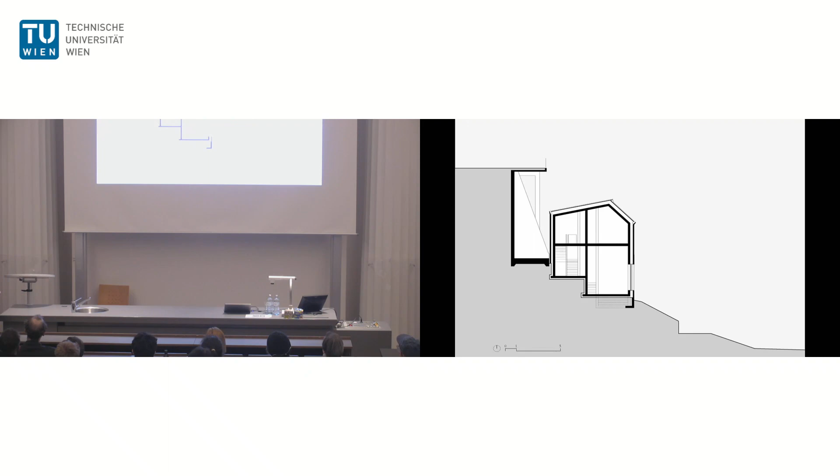Okay, and now go back to the basic tools. As an engineer, I like forces, I like balance. Forces have a feeling, we feel as men the forces. Forces are amazing, and if you try to work with forces, it comes to balance.

So we say force, balance, materials, and then geometry. Now you can start to see when you go around on this wall, you will find different dimensions. Now it's architectural geometry, but when you do a structure, there is a lot of geometry. Having a feeling of geometry means doing a nice structure.

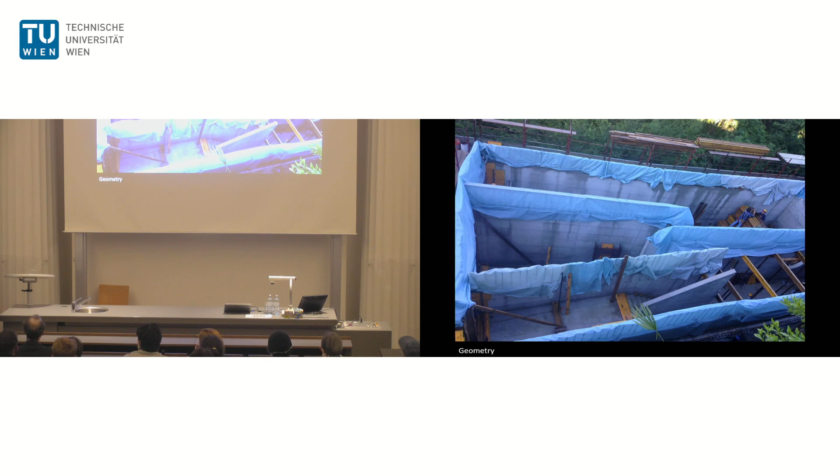Then another thing that for me is really important is the construction process and the imprint of craftsmen. I think it's really important to preserve that, and that goes beyond the materials, go beyond. Just seeing all the work in the construction is something that makes the construction rich. And you see this, Luca was cutting and doing all the formwork in a traditional way.

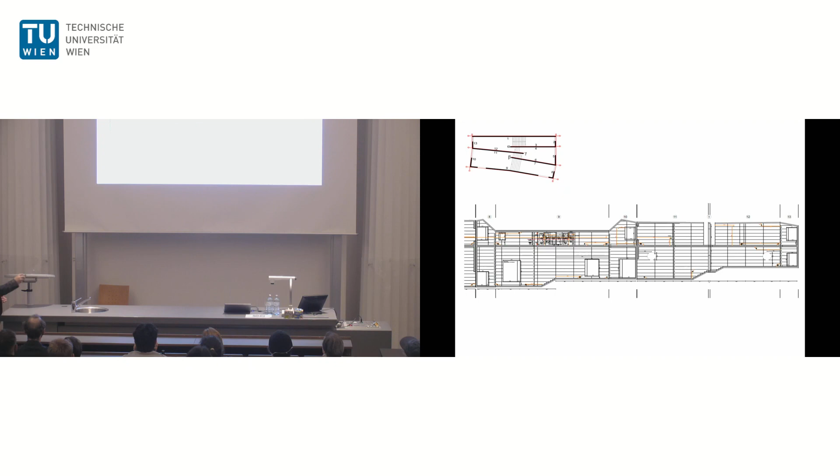And then we just go in deeper. I just draw the formwork, the step. You know, with this traditional formwork, you cannot put concrete too high. Then there is some joint between slab and walls, just to make it disappear.

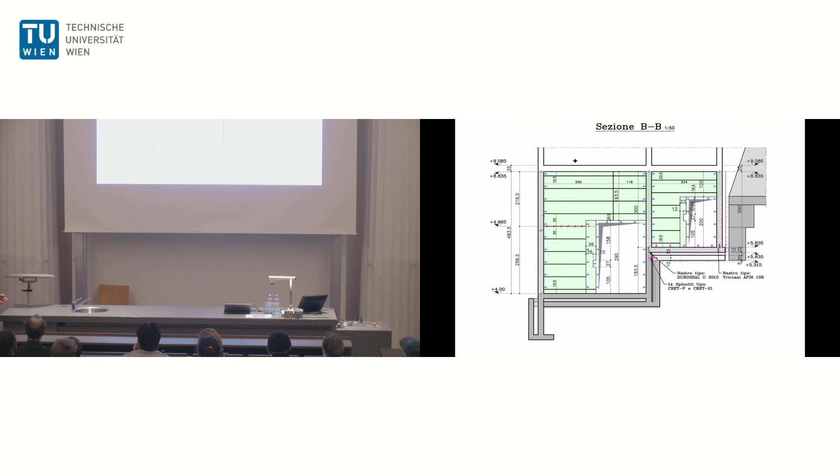I wanted to show to my children the construction as it is, and to put no things. Then I spend my time to take things away and not to add. And then you just see, this is the reinforcement with all the technical installation at the interior of the concrete.

And there you already see a bit of results. You see in this staircase, the formwork that goes to the end. You see the walls, you see the staircase, which is built between walls. This is the interior, you see the different levels. It's always the same concrete. It's a building space, it's really robust.

And you see the geometry and the light that take part and make games in this space, how nice it is. Let's go one step further. This is Christian Scheidecker, you see this staircase. And let's get one back, and you see that it continues at the exterior. This is also nice.

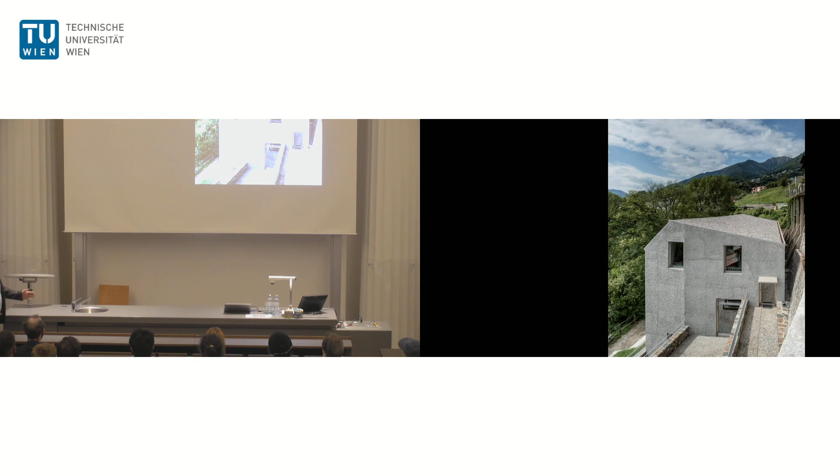And this is from the exterior, you see there are the stones. The concrete is only for, it's a special thing for myself and not for the other. I just put it at the interior. Great.

This was the basic tools. These are the things that I want to put in all the projects that I do. And these are the things that I want to try to do in a different way in the future, just using technology.

Of course, basic tools alone are not enough. We need a strategy for how to do building. And the first strategy is to divide things into portions. This is something that is part of the engineering thinking, to divide things into portions just to make it clear, to take a decision. And I will speak about this idea, this set of problems.

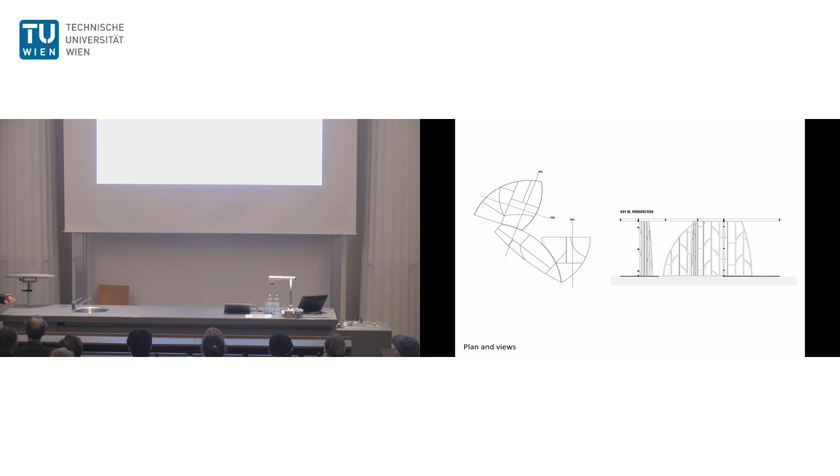This was the topic of the Biennale in 2016. And this was the plan and view. It's quite big, 140 square meters. And then, as with every structure, you just need to be sure that it doesn't collapse, that it works, even if it's quite light and quite simple. Nevertheless, it's good to pay attention. I do a statical model.

I do a calculation, and then I receive results.

Quite complex, you know. I'm sure you have some lecture in structure. A structure, to stay rigid, needs internal normal forces, shear forces in two directions, bending in two directions, and torsion. This is all the kind of forces that I receive.

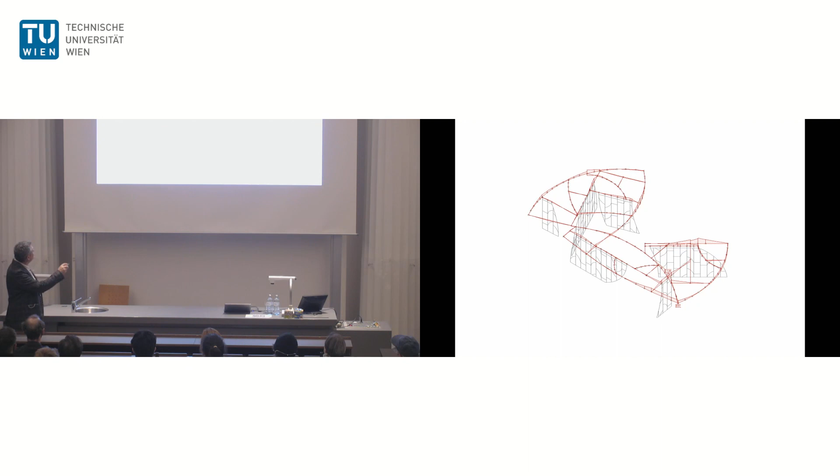So I just say, okay, if I want to make it simple, I have to divide it in a way that eliminates difficult joints. I look a bit at wood, what you find there. The most simple joint is working in bending and shear. If you have torsion, it becomes more complex. If you have bending in two directions, you are almost lost.

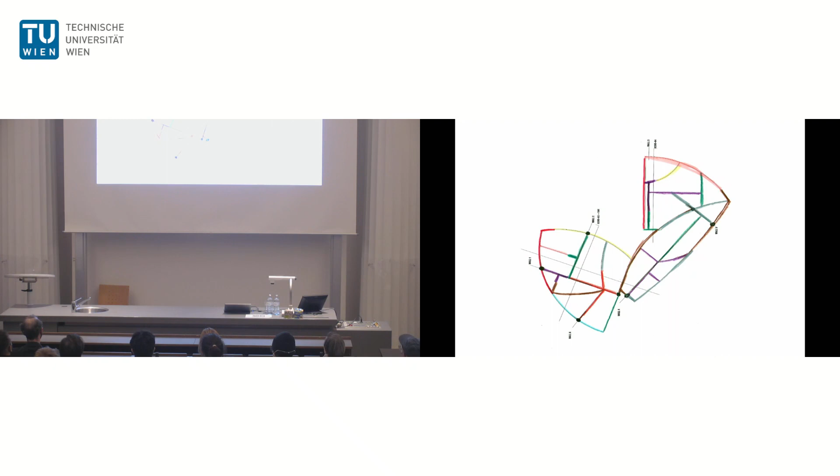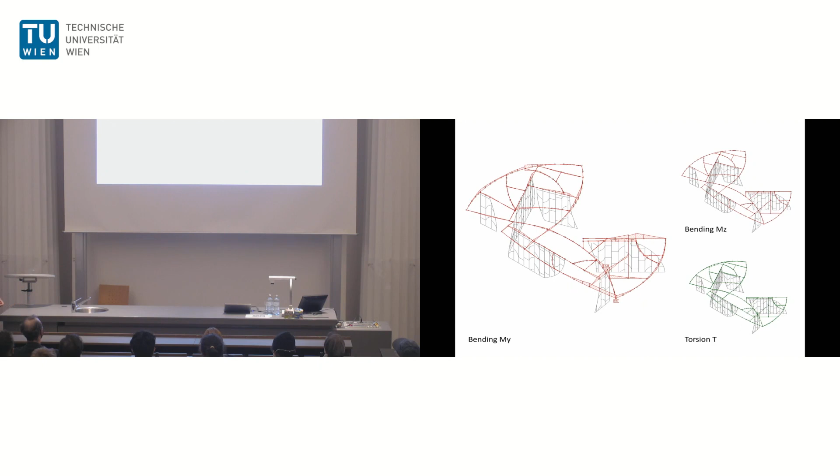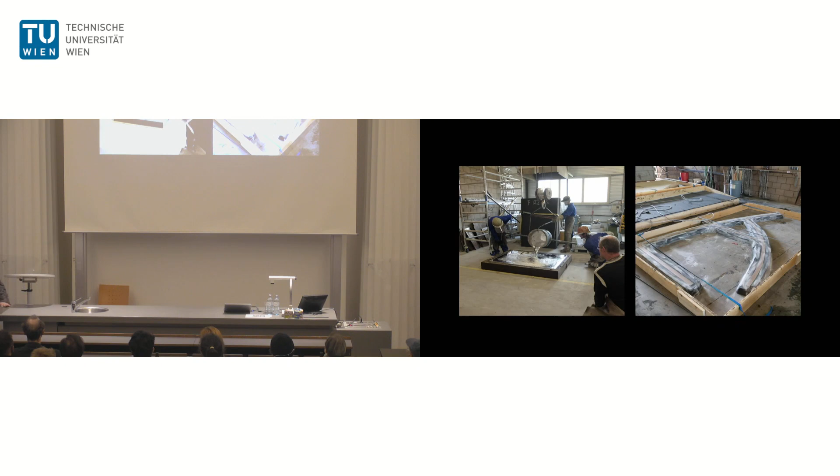So then you see how we do that. The aluminum, you get it warm, and then you put it in shape. This is a panel for the floor, and this is the frame of the structure. There you see the construction and the nodes, which are reduced to only one plate and one piece of steel, really thin.

It just disappears. I really think if you want to make a nice project, you have to be able to reduce things to make them disappear. And this was the construction. It stays.

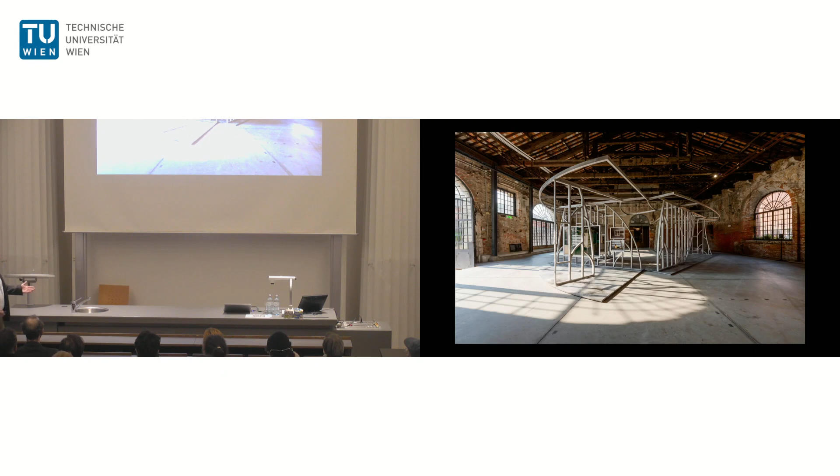So first we have to divide things into portions just to understand it. And the second thing, we have to put it together in a way that we create one unit. This is really important — just try to create one unit through the building process.

I will speak about that with a completely different project, a residence for students in Zurich. This project I did this time with Atelier Scheidegger Keller, and it's only the facade. If you go to Zurich, this is the building — look at this facade.

This is what we want to speak about. Let me show you this building in plan. It looks simple, but it's not that simple because it's not straight — there is a light curve. Then many windows, you see this double height.

And then we have a place where you can grill — it's for students, they have a common space, a common terrace where they can make fire. Then there are pieces that come out. It's quite complex, especially if you want to build it in brick.

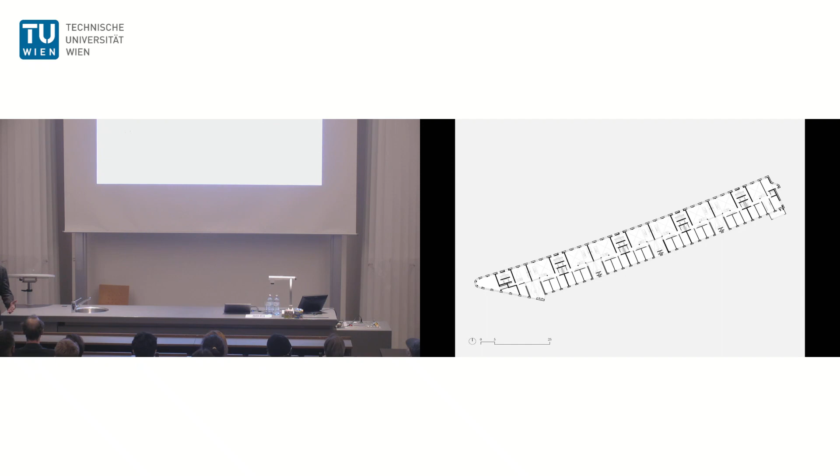This is how you do a brick facade. You see there is the insulation, the windows, everything, and then this is the waterproofing. Then there is some space in between, and then we have the brick, which is carrying the loads vertically.

So it's a structure, but it's not stable — it needs horizontal forces anchored to the structure behind. But because they wanted to make it cheaper, they just did a skeleton, so there was no way to put this anchor. We built a wood structure to carry these loads, especially because in Zurich they use 20 centimeters or more of insulation, which made it really difficult to place this anchor.

And last, there is this horizontal piece of steel, which forms a truss. They are completed with the mortar. If you put some compression, you see that it's a horizontal truss which carries the loads to the anchor back to the facade, giving the stability of the wall.

Great, we wanted to build with these pieces of facade. And the discussion we had was this one: at the lintel, if we want to make it conventional, we'd use a concrete structure covered with Klinkerriemchen, these cut brick pieces, or just a steel lintel.

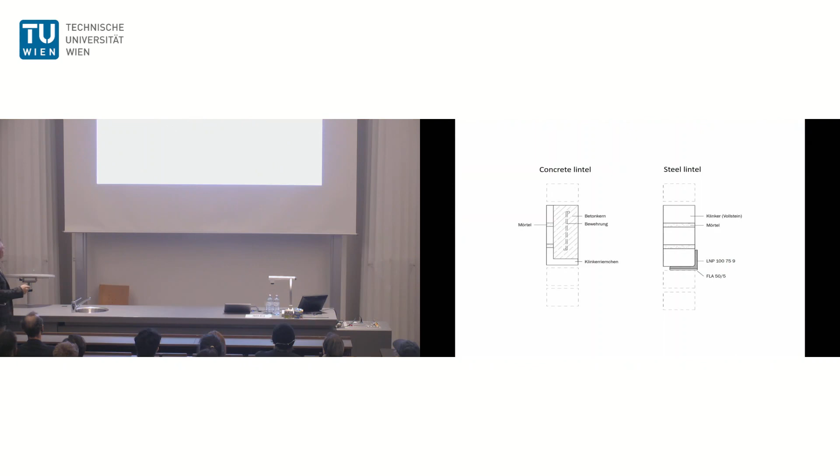And I said, if the structure is lightly curved, you can do whatever you want with concrete, but it will never fit the facade, it will never give one unit. On the other hand, you could say this piece of steel is just a piece of steel, maybe not so interesting. So I said, let's work it out a bit with this piece of steel and see what we can reach with it. Then you see we built the wall, continuing around windows with really simple standard profiles.

And then we just go to the end where there is this curve. You cannot do a profile that goes from stone to stone like this one. You see that this stone is a bit higher.

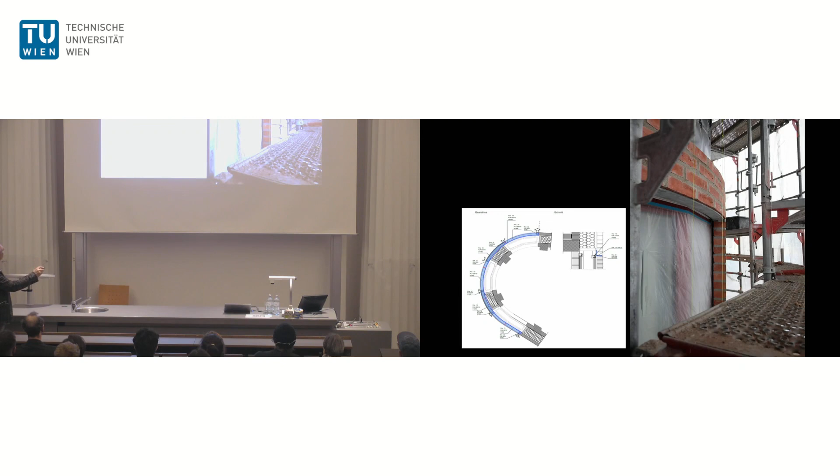It's not stable, and I say, okay, let's continue over all the facade, all around. If you give many supports, it just becomes stable. It's really simple. You see there the situation. And then the angle, this is an angle.

Square angle of two windows, and you see the two windows, and the stone have to fly. And this support can work. We just have to cut it in pieces, put it together, and hang it at the middle point. And then we can continue to put the stone, the brick, one after the other in a standard way. And that creates one unit.

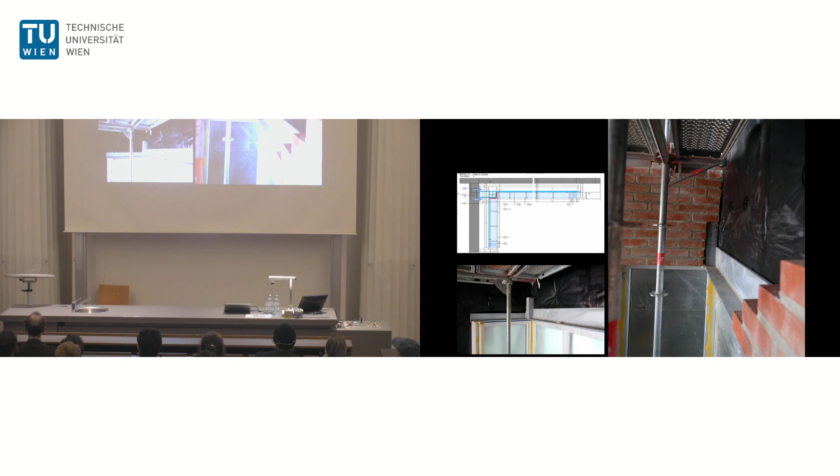And then now we start to make a bit of a game. Okay, there are the entrances, but we have the steel. Let's try to make the steel a bit longer. Then it becomes part of the structure of the construction, and just shows how things are built, and everything becomes one unit.

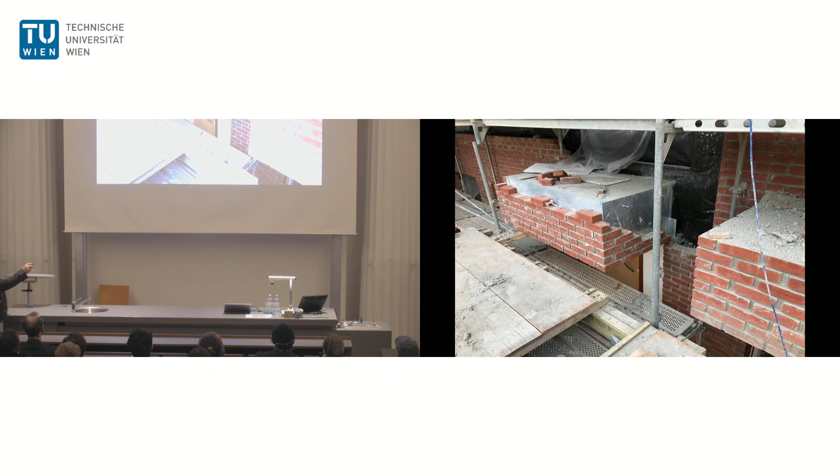Of course, this is a piece of steel. Usually we just cover the steel with the brick, and there are other entrances where the piece of steel is covered, and there is a box with brick.

This is the part which flies, that goes. It's the same thing, just a bit stronger. It's not a piece of steel; it's a beam.

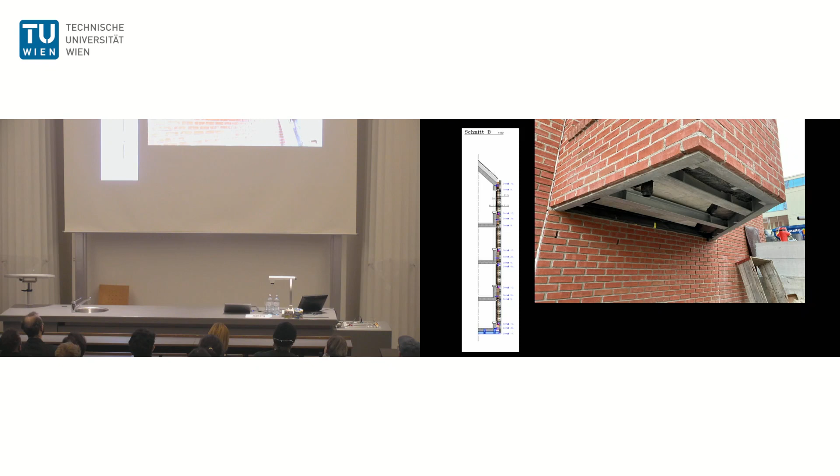These are the balconies. We just add to the vertical part a beam or flat element. There we just connect the horizontal reinforcement of the brick, and we get rid of the problem.

But for the one who is doing the work, it's always the same thing. You just have to put stone one after the other, and he can follow the curve of the building, and we never see a different situation. It becomes just more rich.

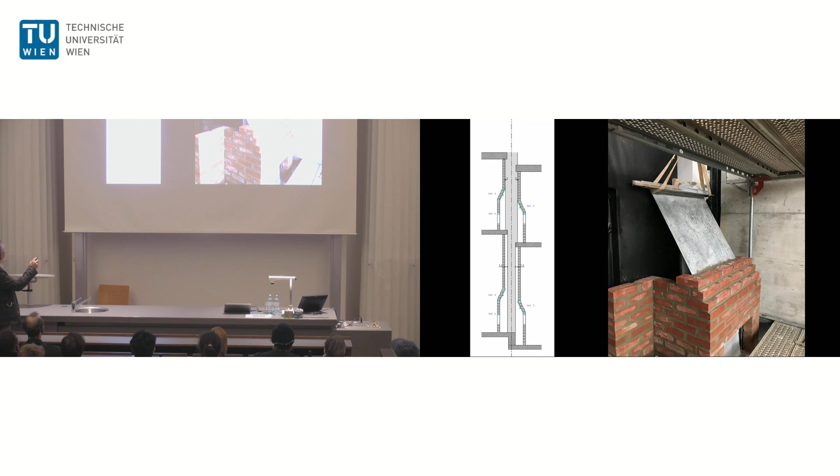And this is the fireplace. You see, we just use brick. We just shift it a bit on the left, and we just give a support. And these are the different levels. And this is a bit of the result.

And it's something that stays in the facade. If you build in a natural way, at the end your eye will recognize that.

Great. Right, now I want to go a bit further. This was a bit traditional. It's what we now have to improve and take into something which is more close to our time, to the technology. And I want to speak a bit about the mechanized construction, that is the prefabrication.

Let's start with a project where I discovered the prefabrication, and how I discovered the prefabrication. It's a project that I did with Atelier Schedeger-Keller. We are in Willen. Willen is a small town, really small, close to Lucerne.

Maybe this is Lucerne. There is this amazing hall of Jean Nouvel. Thank you. This roof, amazing roof.

And this project comes from the calculation model and from the construction. Now we are going back to the further basic tools, and we give a new vision.

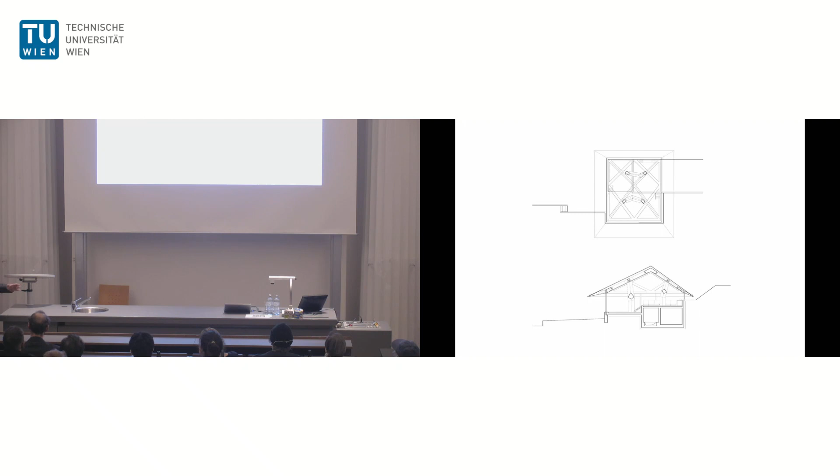But I don't want to speak about that. Of course, I want to speak about structure. It was not so easy to build this roof, because when you do calculation, you know, you can make a calculation of a slab, of a wall, of a column, of a three-dimensional structure with linear elements.

But to put planes which are not flat but have an inclination, and take the forces and follow the forces into two columns, it's not easy to do.

And then I just produced this model. I just continued the column into the roof by dividing pieces and by producing a truss, a three-dimensional truss, really simple. Then you can do simplified analysis. You can design the elements better, and you are more close to the building process.

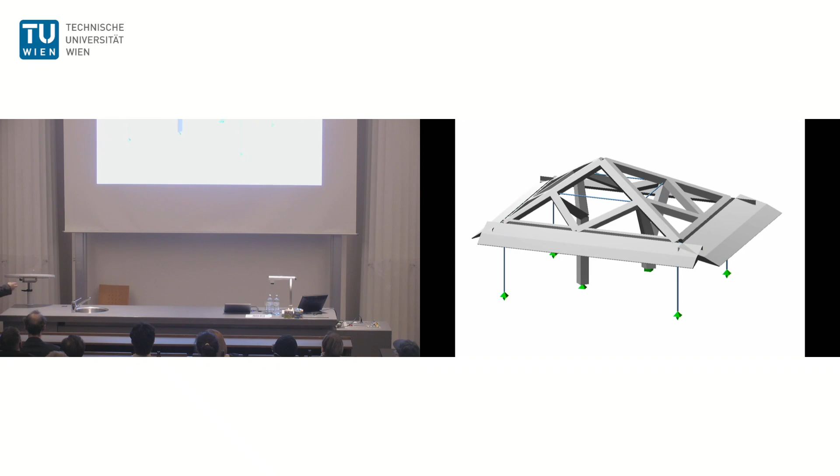Of course, of this model, Christian built his own model of the structure, and then it was clear that the blue part had to be built and can carry the part which wasn't there, and then we studied different solutions. Let's put wood, steel, but we say, okay, we stay with concrete.

And this is a bit the model in wood, just to see a bit better how it looks like. You even see the thermal cut between interior and exterior.

And then we just do the formwork, and it becomes a construction problem. You know, you cannot build a nice building if you don't know how to build it. And if you use concrete, concrete is fluid. If you have to put concrete on a slope over this high, it just falls down.

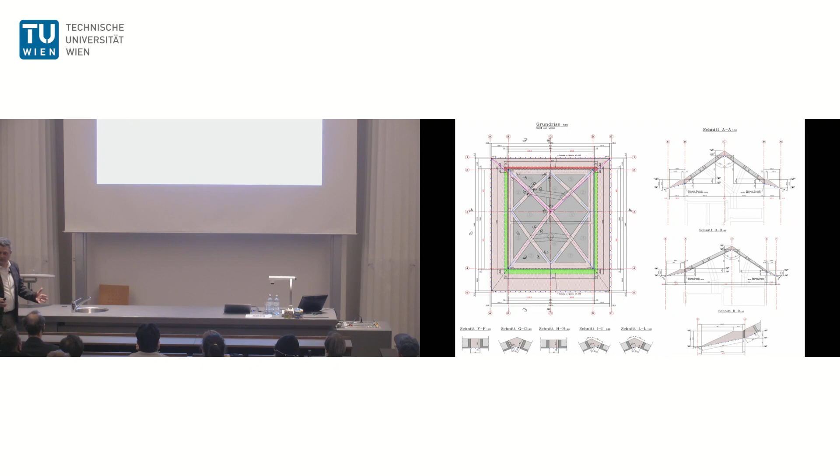And then one idea: let's complete the panel, this panel that comes from the calculation, with a vertical element in order to produce, by this lost formwork, with the precast element, the beam that we will put in place in a standard form. We already receive a closed geometry, really simple to build.

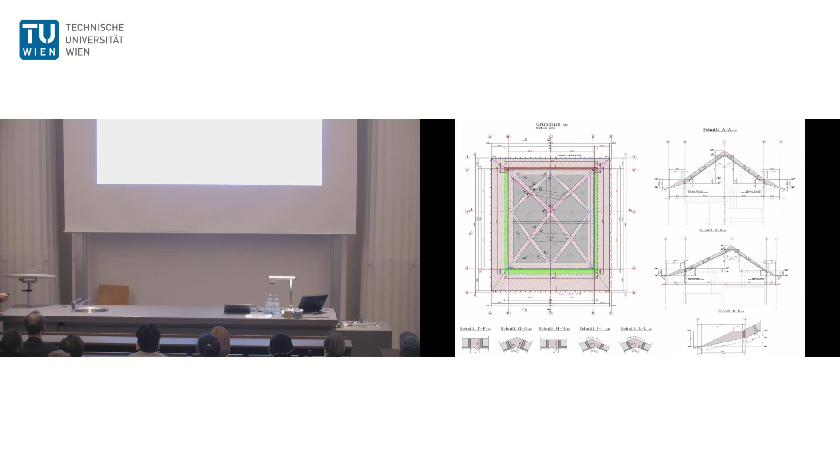And so there are our precast elements, which come from the calculation and which are an incredible help for the people that have to build, which causes everything to become really simple and really precise. For this construction, it was really important to have something precise.

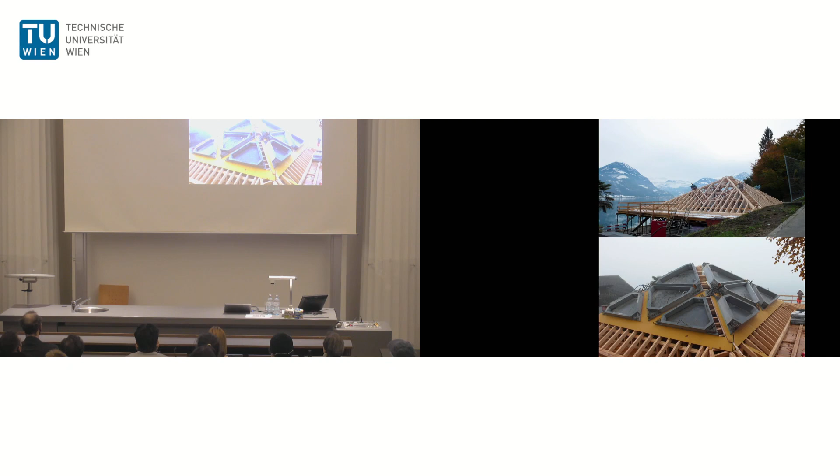And there you see the construction steps. This is the support. Then we put the formwork, also these precast elements. We close the space in between, just to create these beams. And then we have the reinforcement, which we put there.

Pay attention to this element. I will tell you something after.

And then you see the exterior piece, which is cut. It's completely independent, and connected to the interior one with steel beams, a bit curved, with some insulation.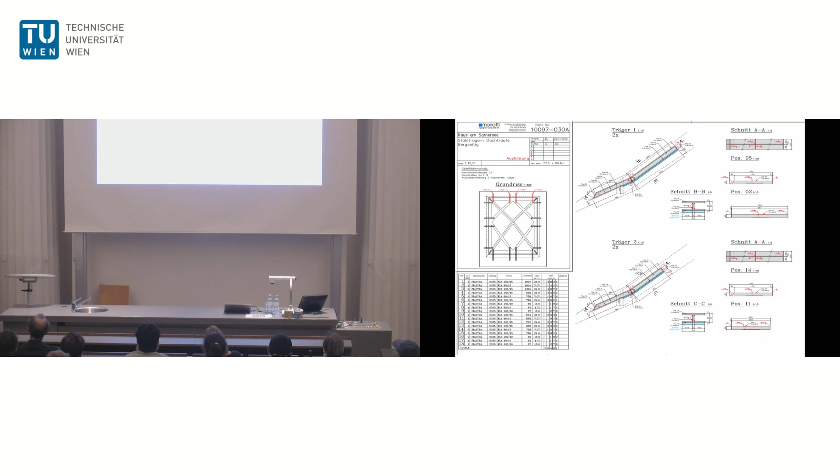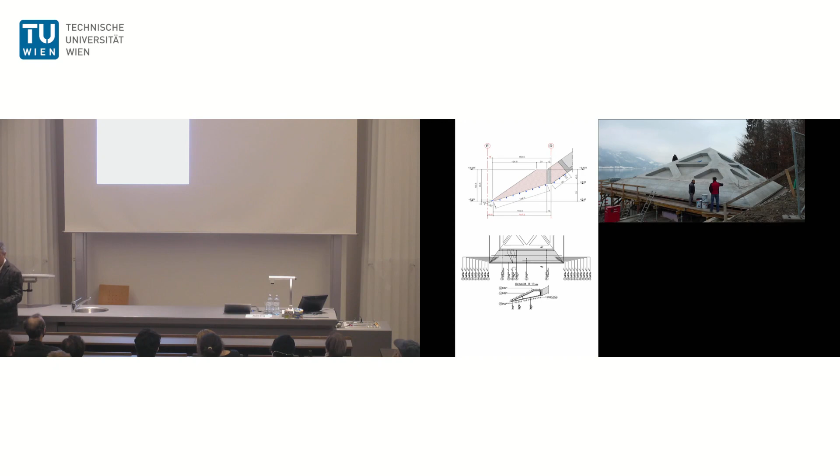And then this is the exterior part that we built after. And you see this amazing roof, which from many pieces becomes only one. Just get it together. And you see this is a view of the living room.

You see the promenade, you see the lake, you see a bit of the mountain. This is from the kitchen. Give a look, the mountain disappeared - I just left it a bit. The sea is not so big, but when you are in the kitchen, it's like being at the sea.

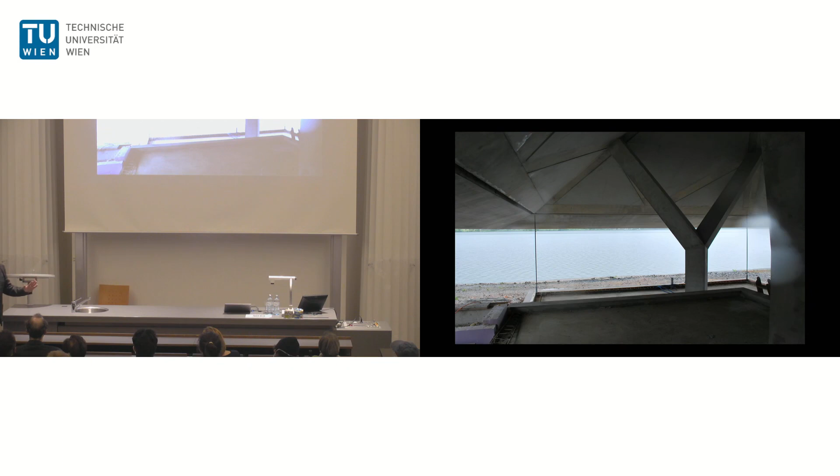And when you go down to the bedroom, you just see the mountain, and then you have a different atmosphere. You see this piece?

Let's go back to this image. This is symmetrical, this support. This one is a bit asymmetrical. When you put a roof, a symmetrical roof, on 4 points, and the roof is symmetrical, the forces just split into 4 parts, which are similar.

But now let's try to carry the same forces, which on one hand like that, or on one hand like that. This one just goes down. And if you have a roof and you just let one element go a bit down, it starts to shift.

At the beginning, this pillar was a bit more close to the center. But during the construction, Christian said to me, 'Can I move you a little bit?' Yes, of course, let's move it. But then, when I redid the calculation, I was really saying, 'Oh no, it's not possible because we just moved it that much.' But the movement that you receive on the windows and the horizontal movement are incredibly high - we are speaking of 4 or 5 centimeters.

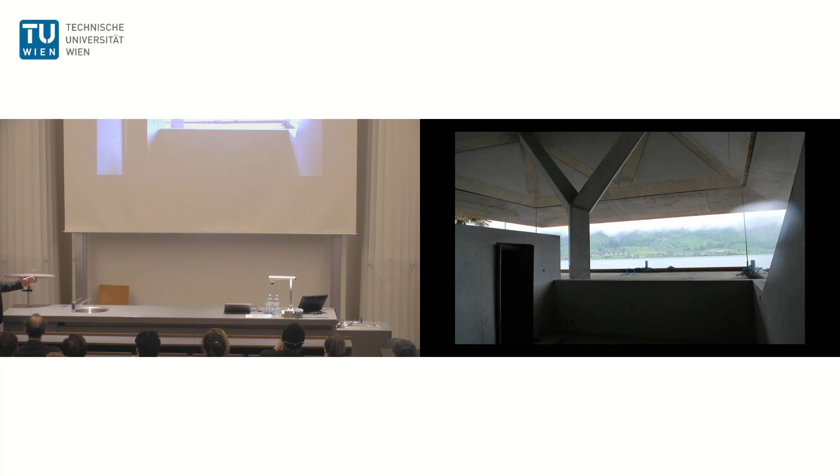And after the construction, I just made measurements, and I just let it be. At the beginning, it was one pillar for each corner. Now, there are 2 pillars and 1 cable on the back. But nobody sees that.

OK, and this is the house. You see it, it's amazing. I can tell you, when you go there, it's small, only 90 square meters, but it's incredibly rich.

Let's go to another project. I want to speak about geometry and joint. If you do precast, you cannot avoid the joint, no? But it's just how to accept, how to look at the joint. This is important. I have the opportunity to speak about a project I did with Studio Anne Holtrop, with Anne Holtrop. It was my first project with Anne Holtrop.

It's the National Pavilion of the Kingdom of Bahrain for Expo 2015 in Milan. After Milan, it went back to Bahrain. This building was moved from Italy to Bahrain. So we shifted a 2,000 square meter building in concrete to another continent. I think this never happened before, but we didn't realize that at the beginning. This was the plot, Expo Milan 2015, and this was the plot of the state of Bahrain.

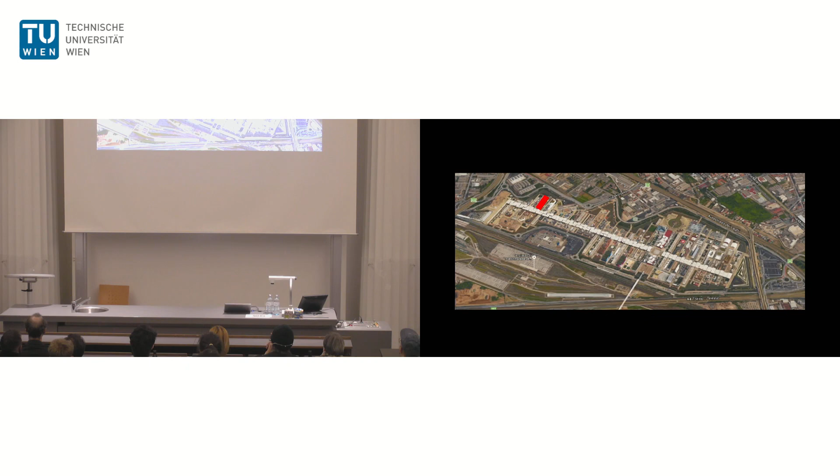And the idea of this pavilion - I don't know if you've visited it or know this pavilion a bit, but you will see it. Basically, what is a national exposition? You have to try to take the characteristics of one place into another. You just look at the shape and the landscape and try to redraw it, reinterpret it with line and circle.

And then, if you put this idea onto this plot, you just receive such a drawing. And then you have to try to give the people that visit this building the impression of being in Bahrain. You put everything you can - the color, the smell. And this you can do with trees, you know.

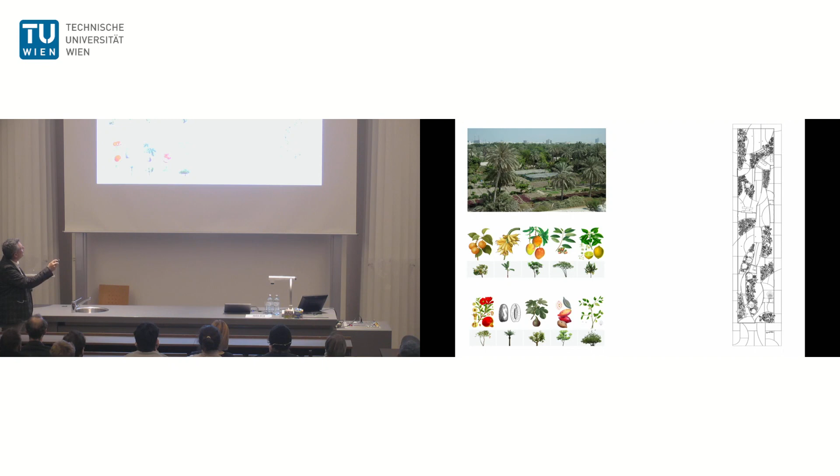And then you see the project become more rich because you start to take place away and put some green space with trees, and then there is a walk that you can do from one door to the other, or coming back. It starts to work.

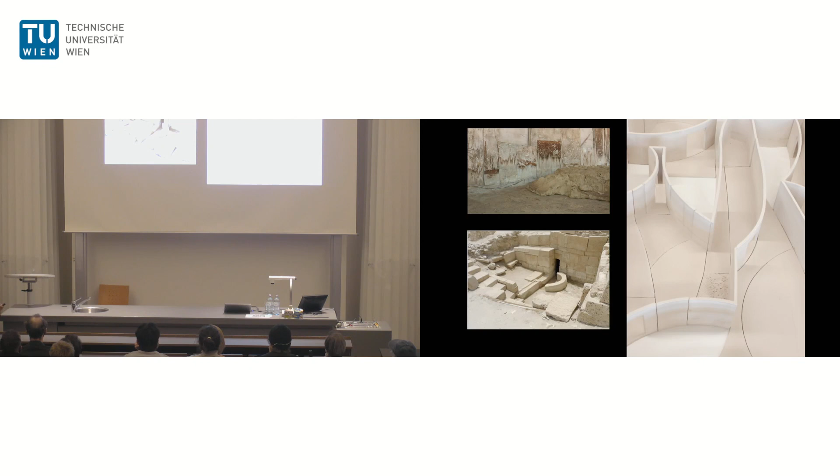And then, of course, this was a bit my part, the construction. This kind of material, the stone - let's try to build it dry, to put stone together. Not all stone - we wouldn't take stone from Bahrain, put it into Milan, and then back to Bahrain. It was a bit too much. Use stone from Milan, and let's try with precast concrete construction and see what happens.

And we start to make an engineering of this project. This is the tessellation - it's something really nice in mathematics. The shape, how can you put shapes together? Which combinations are possible? You discover that not every combination is possible in nature, which gives you some advice about structure, but this is not the topic of today.

We have a production tessellation - what you can do with a certain amount of money, really engineering. Flat lines, you can do whatever you want, big or small. You just have to pay attention that you can carry the elements. Curved lines are a bit more difficult, because if you make a curved wall you need all this kind of formwork, which is really expensive. And then you cannot have all the possibilities.

We just reduced it to 7, but we let the opening free. We let the angle of the element free, depending on the size of the formwork. You see it stay on this vibration table that gives us a bit of dimension. And then you see a bit of the transformation of the project - this was the beginning, and this was after some months of work. You see this element, this area, become a bit less large, because otherwise we couldn't transport it anymore. And from all these angles, you see that we reduced it to this criteria.

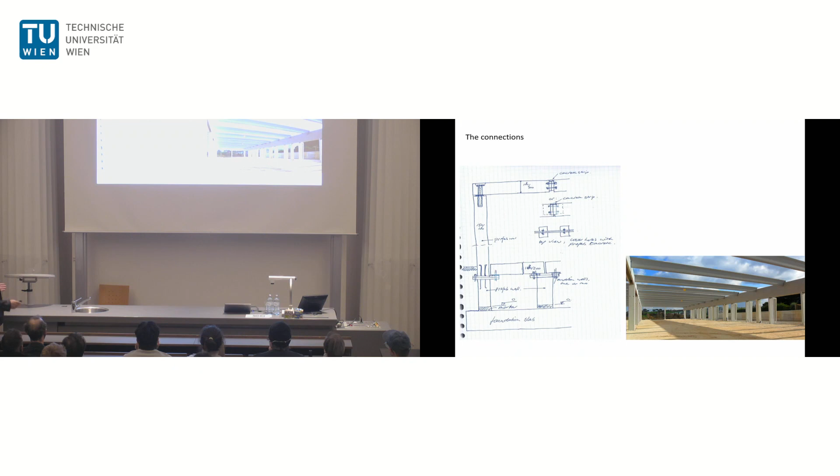Okay, and now let's speak about connection. This is what you usually do - usually you just start to work with steel. You don't do connection with concrete, it's really difficult. And this was the first drawing that I saw when I started to work on the project. And then I said to him, look, I think we can just put things together and we can transfer bending.

This was the image of the discussion that we had. I said to him, with a piece of steel, I can transfer bending from one element to the other, which means I can connect elements in a rigid form, the same way as we saw on the aluminum frame that I showed you at the beginning. Then it was about how you put this stiff element between two pieces of concrete - you needed to have it on one side and then stack it out.

Not so easy, but we just believed that this could be a solution, and we even drew it and tried to understand if it was possible. And then we studied a cross-section of this pavilion.

We say, okay, let's cut it in a simple form with axis. And then we discover the geometry becomes really complex because this wall, this support, which appear and disappear, are really difficult.

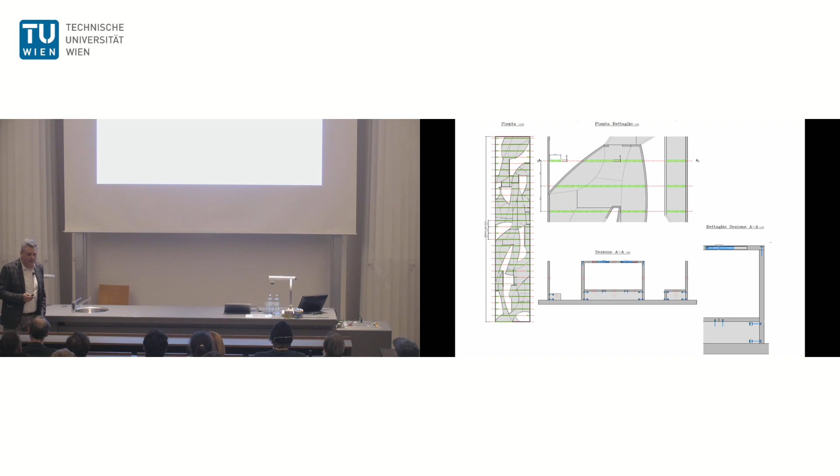And then we try to simplify. We get rid of this support. We just put steel support. We get rid of this, and we just make independent support.

And we just realized that the connection that we studied was good for the wall. Cut the wall in two pieces.

It's important because you can build only small pieces, or you can build a long element and divide it into pieces, because you go from 4 meters into two pieces of 2 meters, which is really important for the transport, both in Italy and out of Italy.

And you see this connection done by the wall, by the construction. We just put the steel on one side. We let one open, we put some concrete on it, and we close it perfectly, and it was stiff.

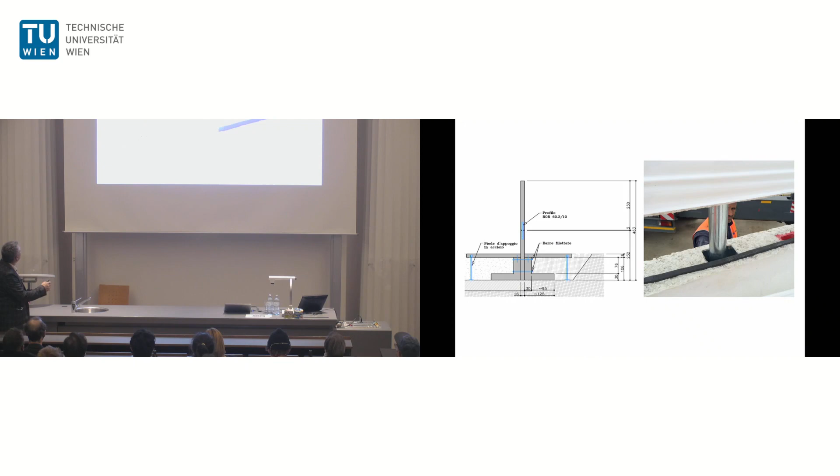And then we worked out these details, and we got one idea: why don't we, if we cannot move it, just let it open? We let these details open to the top, and put it from the bottom, but then it doesn't work because...

You don't have the forces. And at the end, we got one idea: we just use a piece of slab as a beam. We reduce the thickness, and we support pieces of the roof on this element.

You see it better there. This is working as a beam, and the rest is in equilibrium over the other, just in a puzzle, a three-dimensional puzzle. And so this is the design we tried.

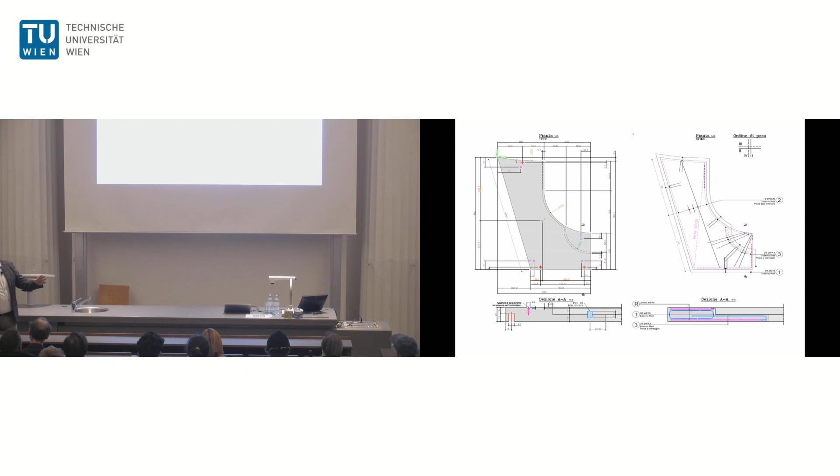We designed it just to see if we have enough space, because we didn't want to increase too much the thickness of the elements. And there you see the final drawing.

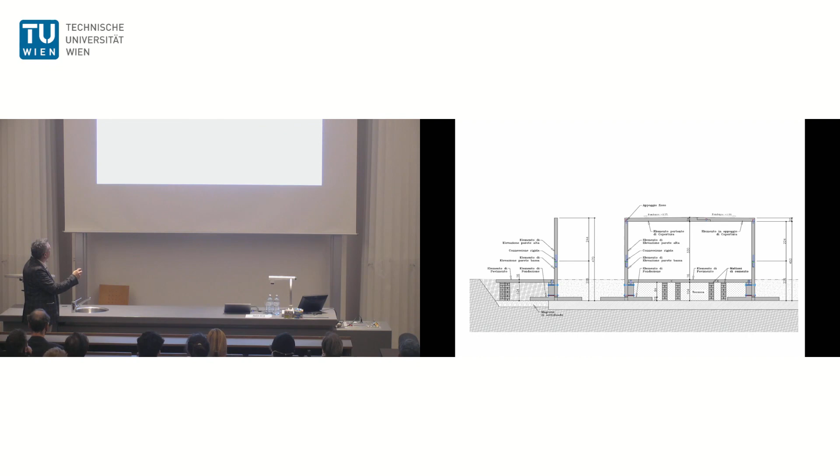We get rid of the steel, we just work with concrete. We have some foundation, the floor elements, the walls divided in two, and then the floor with this connection. And we produce all the panels, and then we put it together.

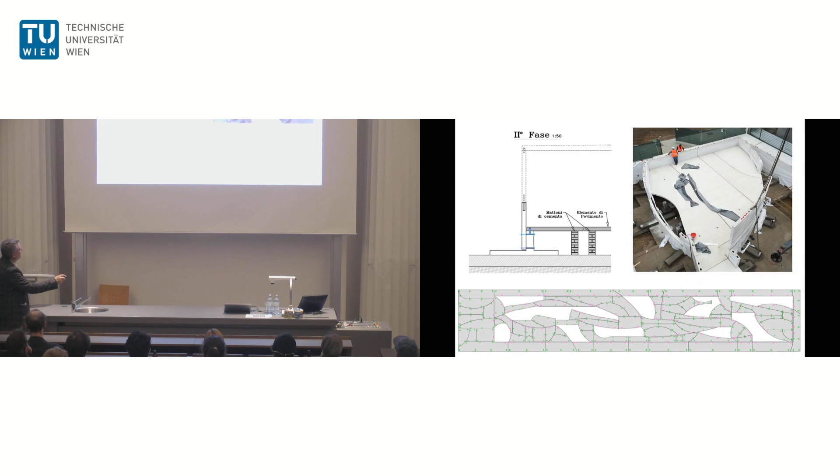You see the foundation with the wall. This is the drawing. Then the floor elements. This was the part that I showed you. There. Yes, there. Then we put the second part of the wall with this connection.

And then, hopla, the roof, and you see this kind of joint. And there we see that this puzzle just gets together without any screw. And the joint becomes the nice part of the building.

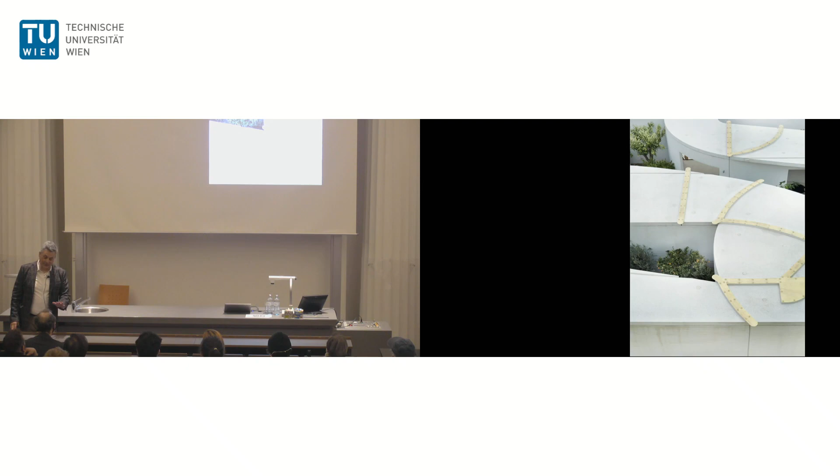And this is from the top. And then it was quite terrible. When you finish a building and you are really tired, to see that again on your table, it's quite terrible.

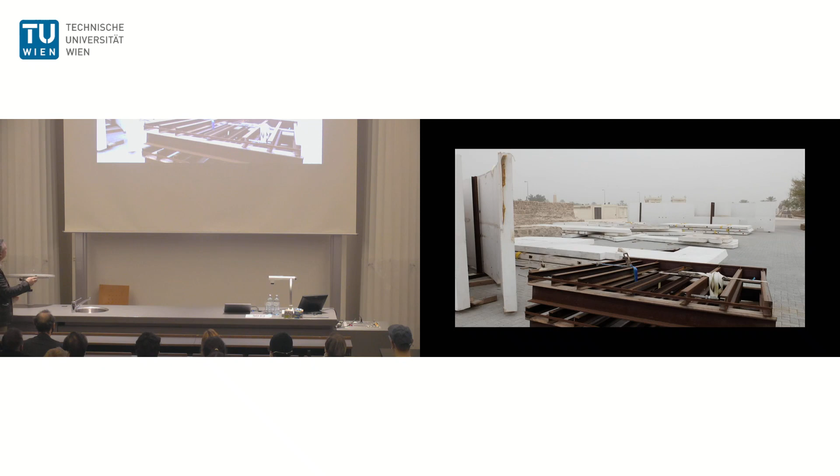Then we take it apart. We cut the steel, and we put a plain steel, because we didn't have so much space between the two walls. And then we put it together again, and this time it's in Bahrain. And you see how nice it is, how it fits in the original place. You never think that this building was coming out of an expo.

Material. This was also a nice, incredible experience that I had with Anne Holtrop. We wanted to build a souk. This is one project that we started exactly after the expo in Milan.

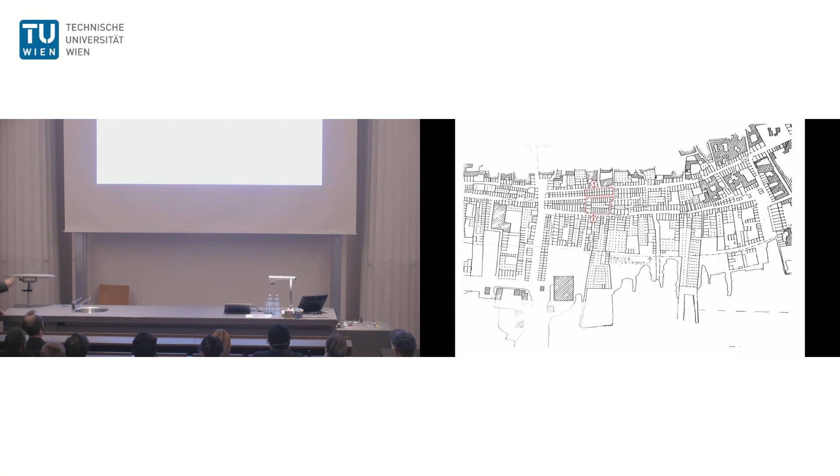We are in the old city of Muharraq, in Bahrain, and we received this plot, this old souk, to make it new, and draw a really simple plan, really simple, because the idea was to make it in stone.

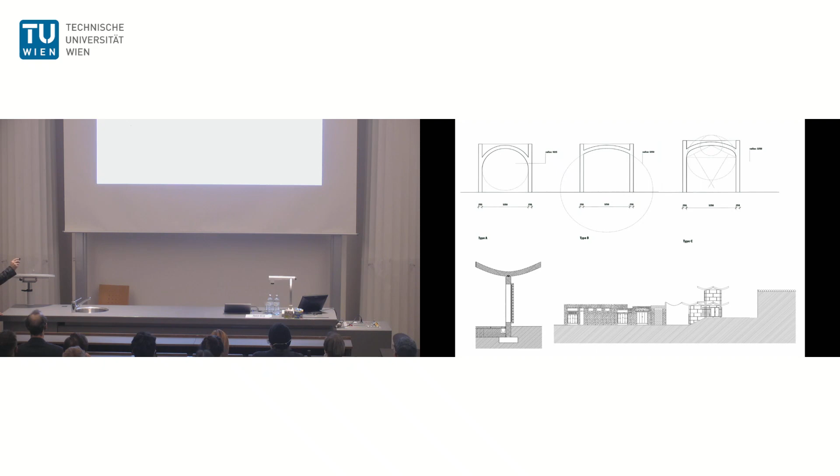And then we just tried, okay, this is not good, don't do a circle if you do one arch. It's a parabola or a catenary, but not one arch. And then we tried to correct it and put some loads on it, and then we cut and we get this shape. And with some work, we get into this shape, which corresponds to this souk.

You see how it is, it's really simple. You have the different market, you just get in on the street. Then there is another street on the back. You have a different level, and you have the opportunity to do two levels somewhere, just to make it a bit more rich.

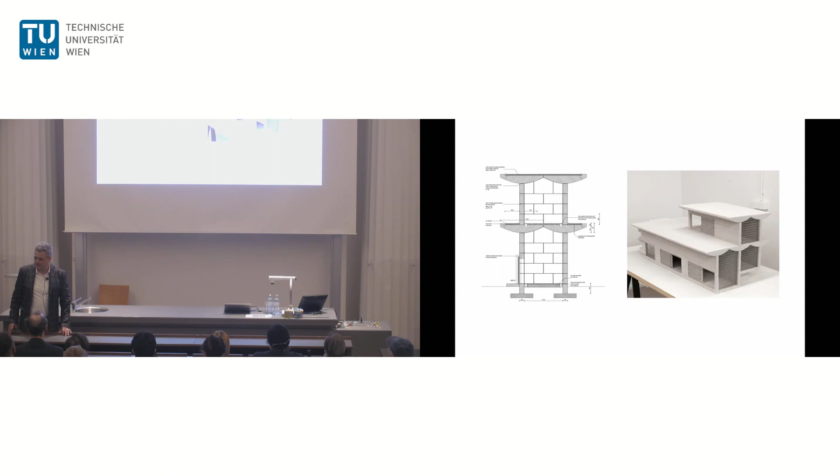And then we say, as usual, let's try to build one piece. We take a piece of this, and basically, these are my drawings. You see that in plan, the foundation, the elevation, section A. These are the roof, with the stone, this is section B. It's just 3 walls and a roof, a piece of a roof.

I just try to work with stone and some connection in steel, just to put it together. In Egypt, they just cut this stone. They were surprised, they said it had been a few years since they did this job, and they were really surprised to do that again.

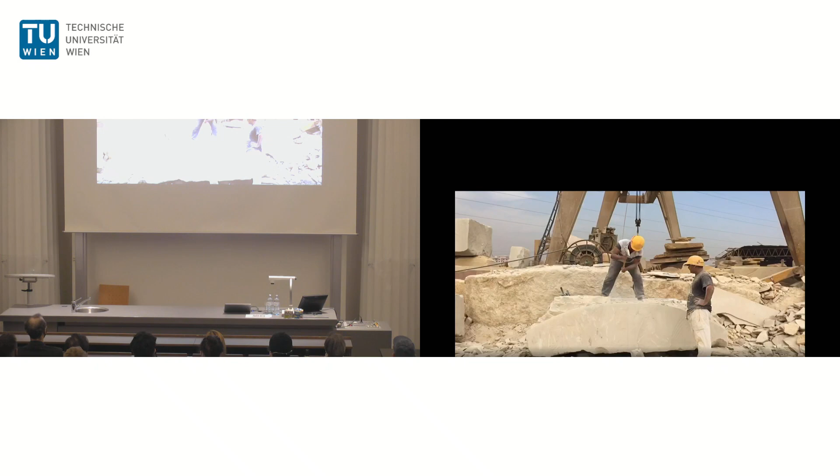You see the stone, and then we build it. You see the steel that puts the elements together, just a bit high-tech.

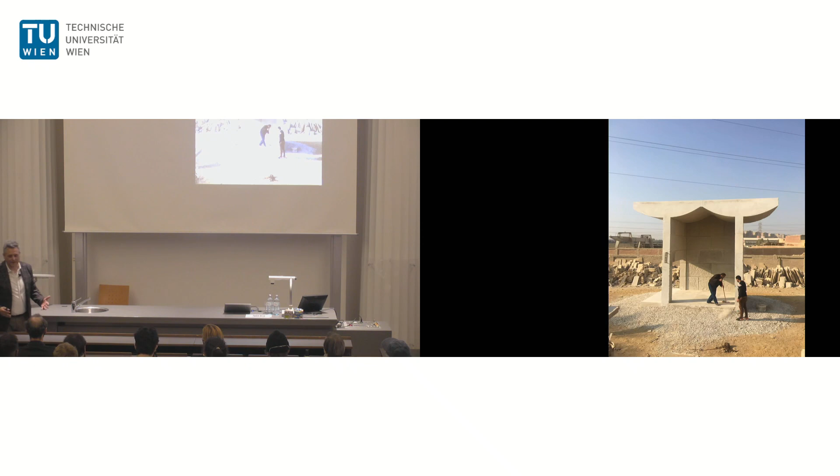When we saw that, we didn't like it anymore, because from the stone there was nothing. If you look at it carefully, these stones are so much work that they lost a bit of identity. And then, this is how you use stone.

Then we go back and we say, okay, we believe in that, and we build our own stone with prefabrication. We just build a piece of wall but let the end a bit free, exactly like this element, which is really controlled, but has one end which is the stone, and we just cut it at the end by using sand casting. We use sand to put in the formwork.

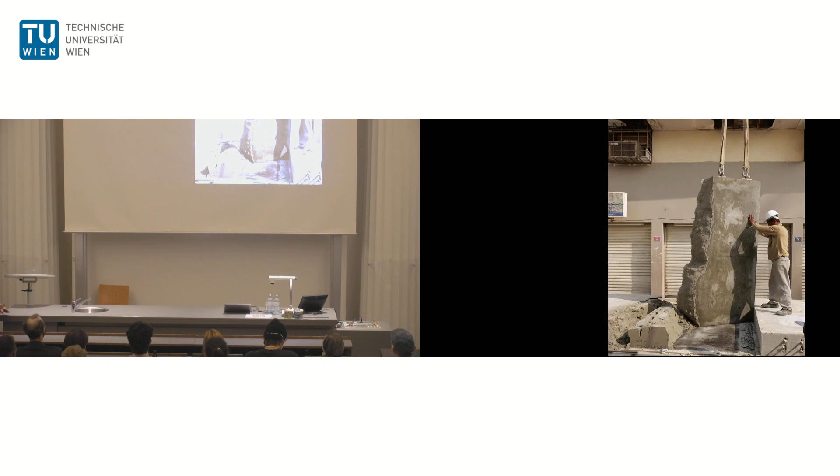And you see the stone, and we build this souk. You see the stone, one over the other, really thick. We could do that because it was in Bahrain, we didn't have to ship from Egypt to Bahrain. And you see it, and now you feel the stone.

Because of COVID, I never had the chance to see that personally, but I believe you need a few seconds to go to the interior and see this stone, these amazing pieces, to feel how big they are. And this is the real material, at the end. It's not just using the stone - the feeling of the stone is much more important than the original material itself.

I want to go to - you see, I just use all the basic tools that I put in at the beginning of a project. I just want to go to balance.

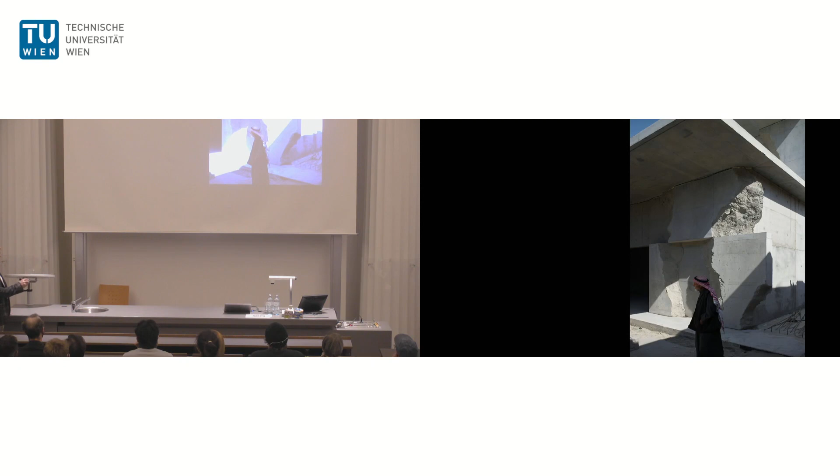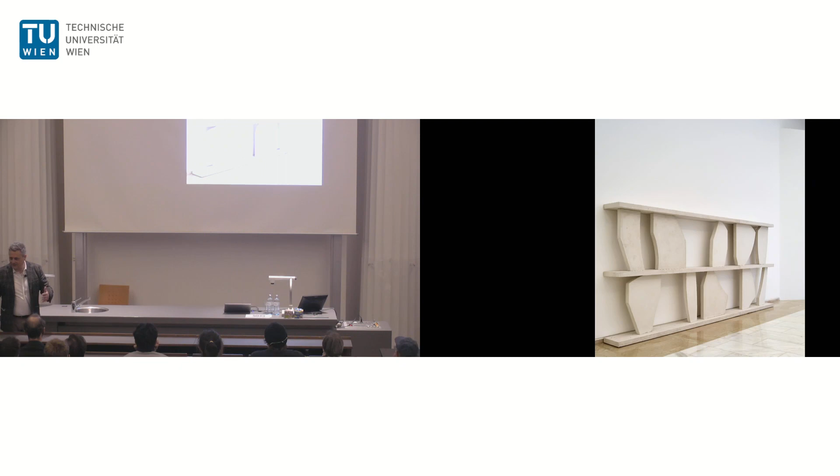We just cut the stone a bit. But if you start to work with cut elements, you will receive elements of this shape. Try to get it in balance in a building. They cannot stay alone, yeah? But if you put them together, they start to work - one is falling on the left, the other on the right, and they just work together. And they can start to become - this is half of a building - together, they are in balance.

Then you see the forces. On this project, you see the formwork, really precise, the elements. It cannot stay alone, but in a building it works. Then you see the game of the forces. It's something you receive in this project.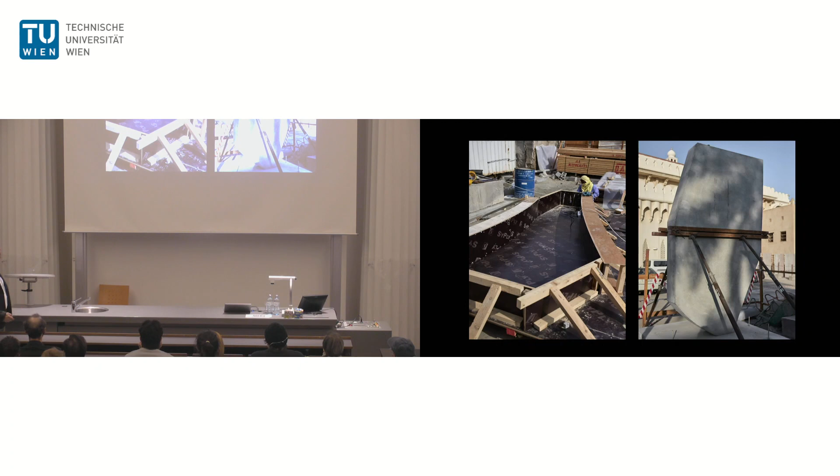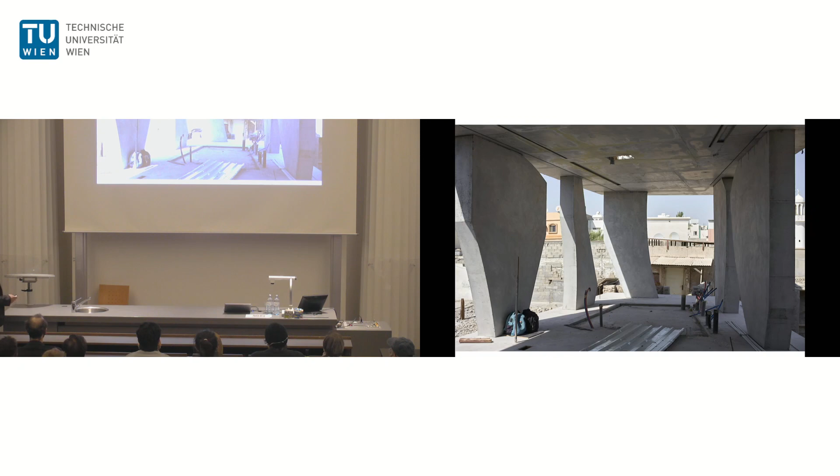You see all the different stones that we produce, all the different elements, and you see this amazing project, which is some rooms of a guest house between old and new renovation - this is the new part.

This is, for me, the most important thing - just to make a work for people, and to create an identity or craftsmanship. And I do that with an old trope again in the green corner building. I don't know if you know, the image that I sent for this lecture is of this building.

Let's try what we didn't try before. Let's try to change the surface of the stone, to make it free - not the border, not the shape, but one face. Now we do one face in concrete over sand.

It seems really simple. This is the building, again really simple - it's a staircase in the middle, two rooms, one on the left, one on the right. There are only three facades. The last facade, in the back, is a standard facade.

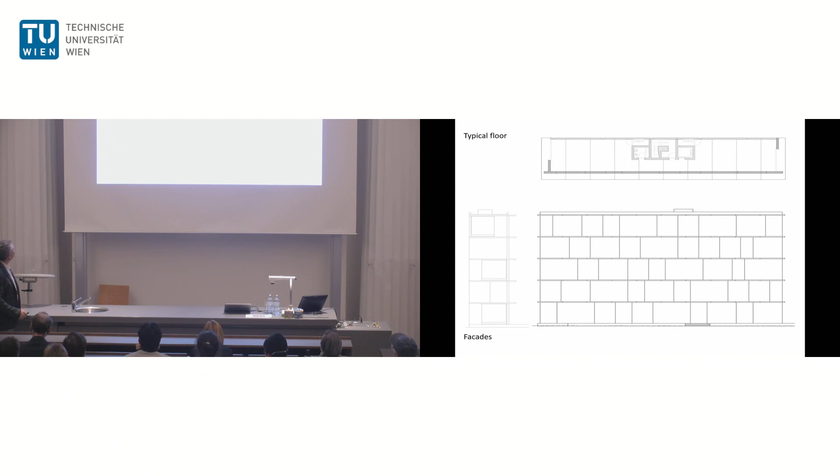I don't know if you know the work of Christian Kerez - if you know this parking that he is building in Bahrain, one of these, R4 parking, is exactly there. I was involved in the construction of the parking, and I wanted to make sure this parking was stable. For this reason, I already left some connection points on this wall, just to give the building support close to this, which has only pillars - and this is a problem.

Okay, maybe with a bit of color you understand a bit better the elements and the windows, and the typology of the elements.

It's simple, but when you let the surface free, you lose one of the most important things for engineering: you don't know the weight anymore. If you let people do the shape, how can you manage that? I just give a rule. I wanted to let people be free, but I also wanted to do my calculation.

I just say, okay, we do a box, 20 centimeters, this is a vertical panel. 20 centimeters are for my structure. I let you more than what I have, I let you 50. But in this box, I give you the amount of sand, this amount, that you have to put in. Then you can move it as you want, but the total weight, we exactly know how much it is.

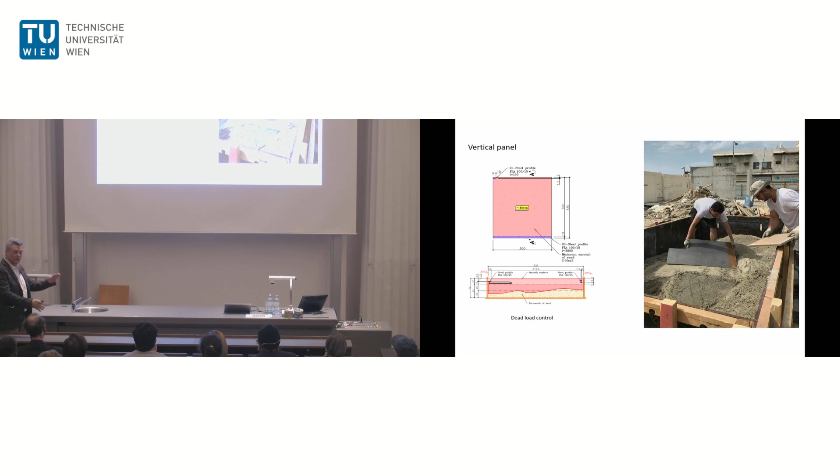We do that for the vertical panel. You see the formwork and the sand, so you can imagine how you can work with that. The drawing was a bit to follow, and you see the elements after, and when you take it out, you just have this shape.

But the structural part, we divide it in two. One was precast, and the other one was in situ concrete, so that they come together.

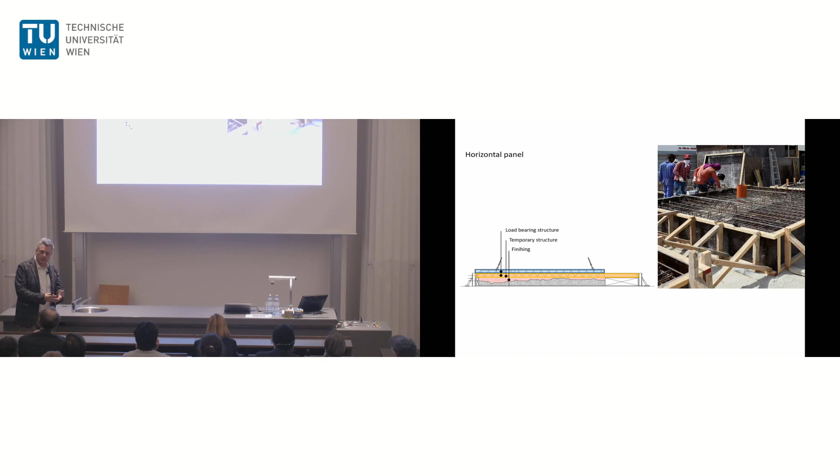Then I just start to think a bit about how you use structure. You can use structure related to the shape. A funicular structure just shows the forces. It's a nice example of Robert Maillart in Chiasso.

This amazing roof, you know a bit how it works. This is one arch in compression, and if you just put compression, it goes up. This is a cable, which in the middle receives the vertical force of the arch. And then the funicular just goes up and down. Some of the loads go in the center and go down like that. This is structure and shape.

Then you know for sure the relationship between structure and space. There are many nice examples. This is one nice building, this one wall which defines the space and carries the loads. This is the house of Christian Kerez.

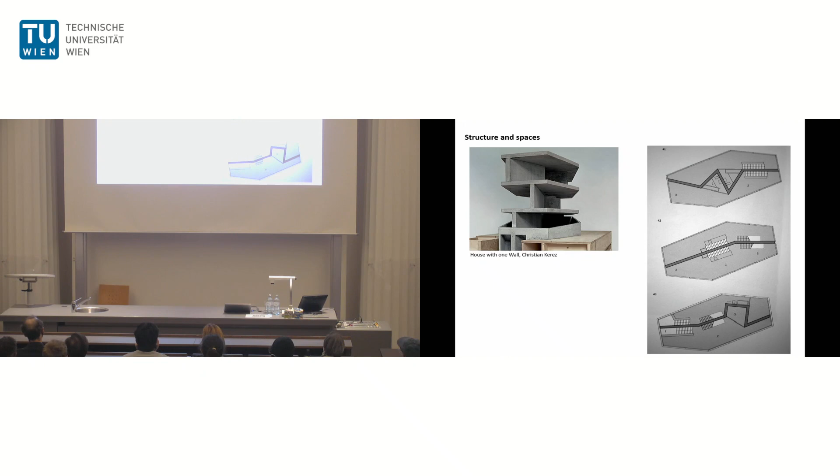And they say, let's try with something similar, components and flow of the forces, how forces are working. And then I say, okay, if I put the floor element, I will carry the loads to the wall on the back, this one, and the wall on the front, which is done by panel. You see, a bit of the loads go there, mostly go just there. There you see the panel of the roof.

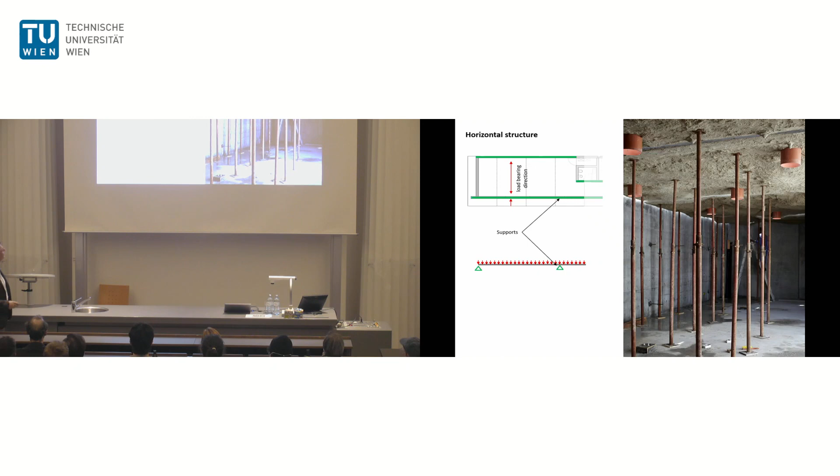And then I say, okay, we just put the stone on the ground. These are really simple, they are stable.

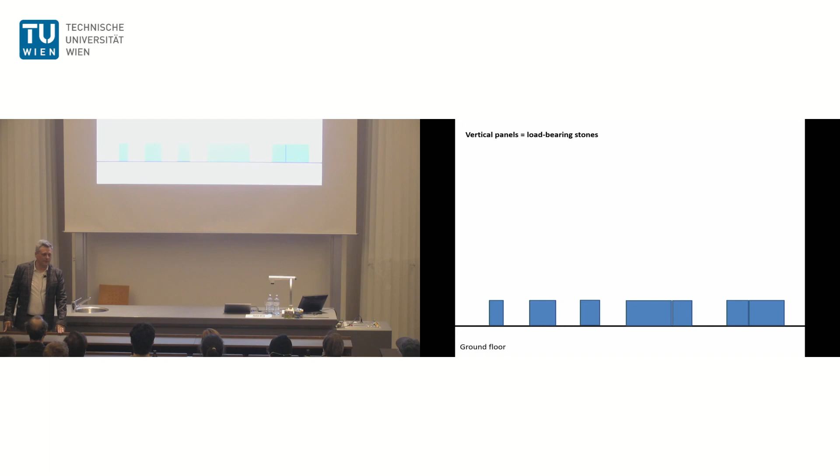And now we continue, we put the floor on top of it. There are some of them which are exactly on one stone, on one panel. These are okay. There are the green ones, which we can believe that they work because they are in balance, almost supported, not continuously supported, but yes, yes, yeah, yes. But the other one, this one, which is flying.

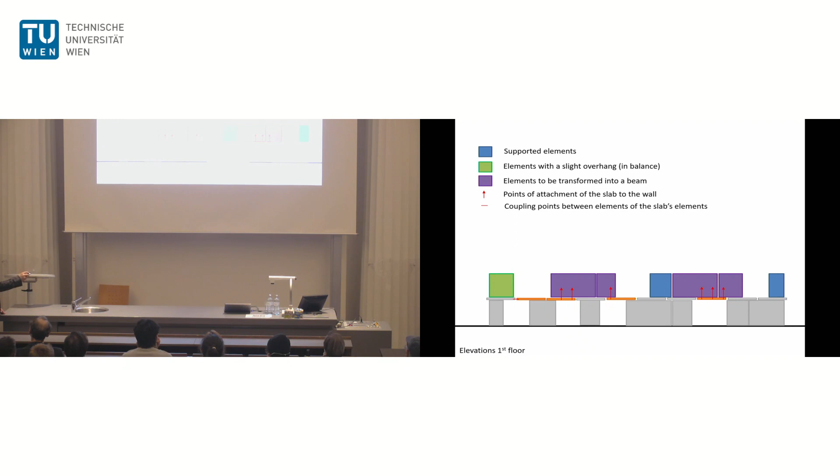Okay, problem. Let's try to put the next layer, and then we see that there are pieces which are giving the loads down. Again, pieces which are a bit imbalanced, but they're still in equilibrium. And there are other pieces that receive a new task: they have to carry the floor which is above. We have to hang, and transform this into beams.

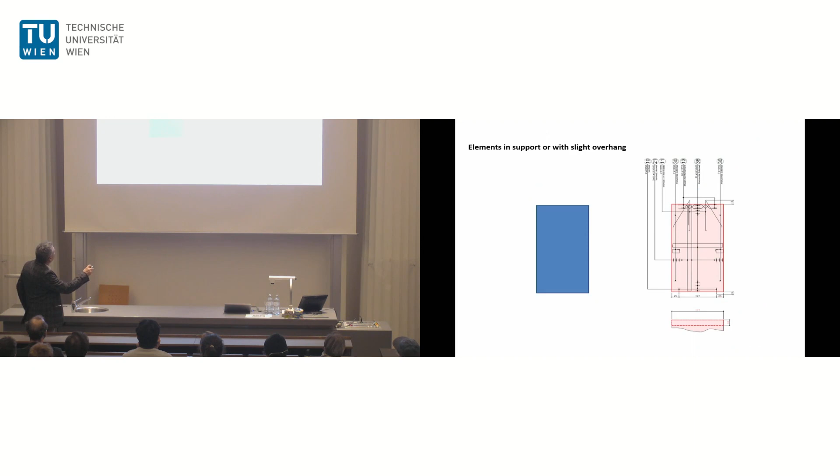This is a standard element, like this. If you use a diagonal, you can just try to put a truss, and you understand that you have to connect it at the top and the bottom in order to transform two pieces into a beam. And you see that this was the standard reinforcement. I just had some connections on the boundary where I welded some pieces of steel just to connect this point and this point.

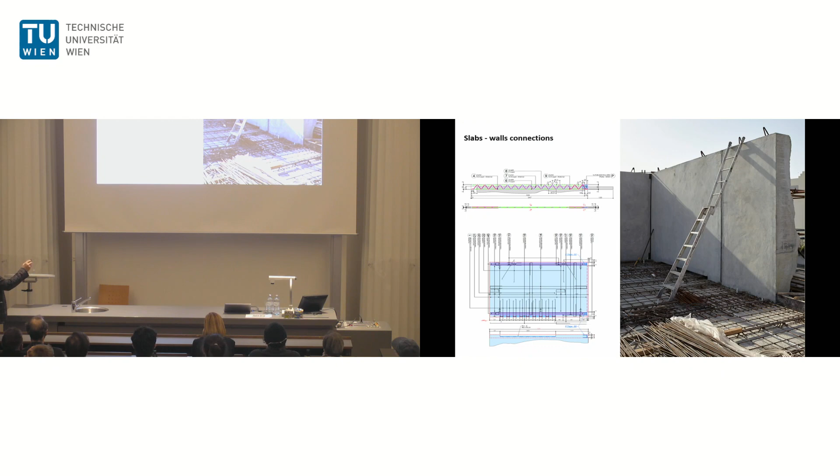And of course, it's not enough to connect the walls, we also have to connect the slab to the walls. You see this piece of steel which is there, we just connected the reinforcement of the floor up to the walls. And so we just can continue step by step, up, up, up.

Of course, there is the stability. Same principle, we just connected the elements in order to take horizontal forces. This is a bit of a study of the forces, how they go by stability. It's a bit late to go through this calculation.

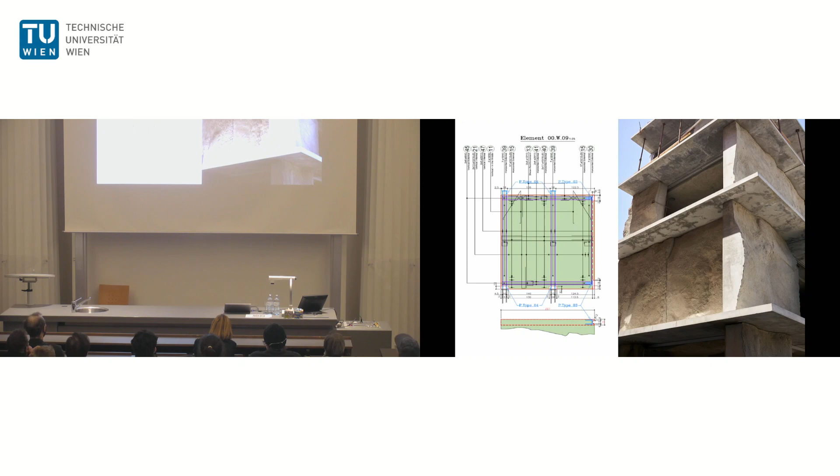And you see the elements, how they are. And in this picture, you already see it. This is the wall which gives stability by elements.

And you see during the construction, the production of the elements, every one a bit different in place. These are elements of the slab. You see that there is the flat part.

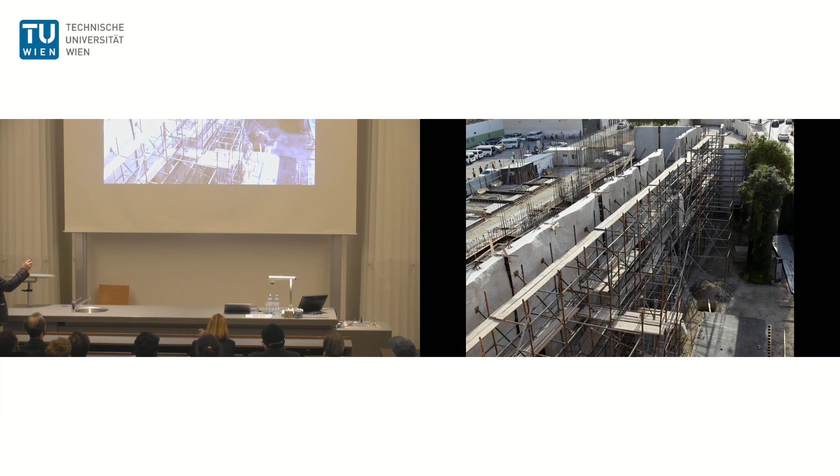Then you see the construction, the in situ concrete and the wall elements, one after the other. And this is the building that is growing. You see this is the precasted floor elements. Then we don't see it, but in the back there is the in situ concrete, and you see the building at the end of the construction.

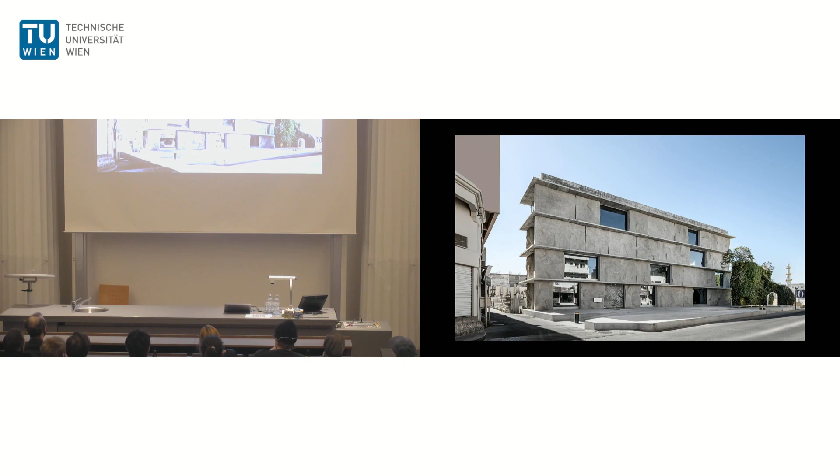So now we have to speak about technology and construction, just some remarks. You see that when you speak about prefabrication, you unify a bit the different forms of traditional construction, the massive and the dry one. Massive is really nice, you can choose the shape. The dry is really nice by the connection.

I mean, we can precast unique elements, and this is something that has a value. To do something that is unique, it makes the construction rich. In this sense, prefabrication opened the dialogue with technology.

We can define a new art of work, which is not the handwork, but is a digital work, which we transform into the precast element into something which is unique. What is nice, it makes people more happy to work on this form.